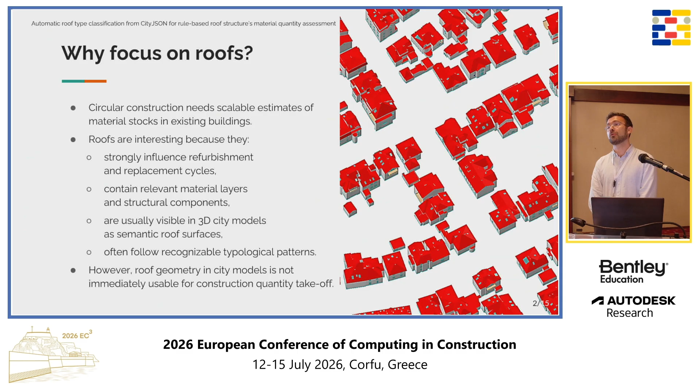However, this geometry of roofs in 3D city models isn't straightforwardly ready for use in material quantity assessment. So this research is a part of the European

Horizon project CircBoost, and our workflow here uses 3D city models where each building is used to extract its elements and multiply the surface, because all the elements are represented by surfaces, and each multiplied surface is extruded to model the solid layers of materials.

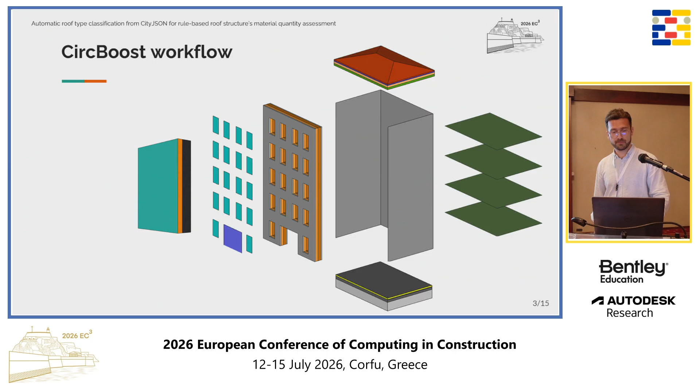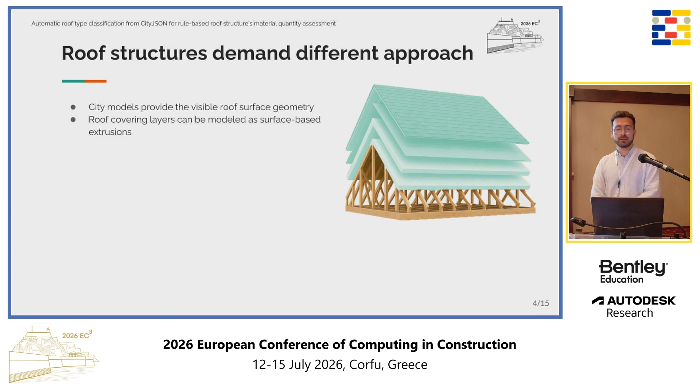So we do that for walls, doors and windows, roofs, also for foundation slabs, and also for intermediate slabs between floors. This logic works for most of the elements, but roofs are an exception, because you can easily model roof cover layers as extrusions of the roof surface, since geometrically that's what they are, but for the structure it doesn't work.

The situation becomes even more complicated having in mind the wide variety of possible structure systems, and it's also to be guessed, because we don't know what is inside or beneath the roof cover.

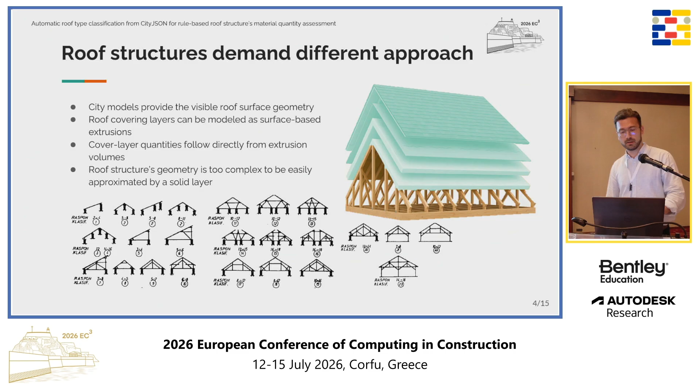So our proposal is a traceable chain. We use geometry as an input to classify the roof type, then we measure some metrics, and then we apply rule-based material quantities.

We use CityJSON as a backbone, with explicit geometric rules, so they are readable and challengeable. We don't use end-to-end learning, because when dealing with thousands of buildings on a city scale, what we value mostly, or equally as the headline accuracy, is traceability and robustness of the representation.

We implemented that in a single dependency-free Python module, where each threshold is a named constant, and basically every intermediate is exported so we can trace everything.

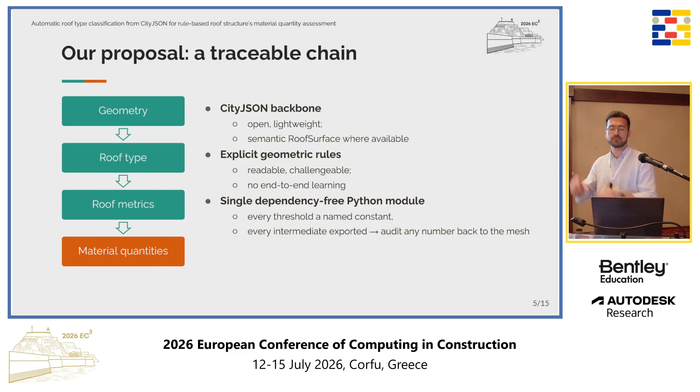So the pipeline goes like this. We extract roof faces, semantic first, with some geometric fallback, we merge triangle soup, which we will see, and you might guess what it is, into clean roof planes.

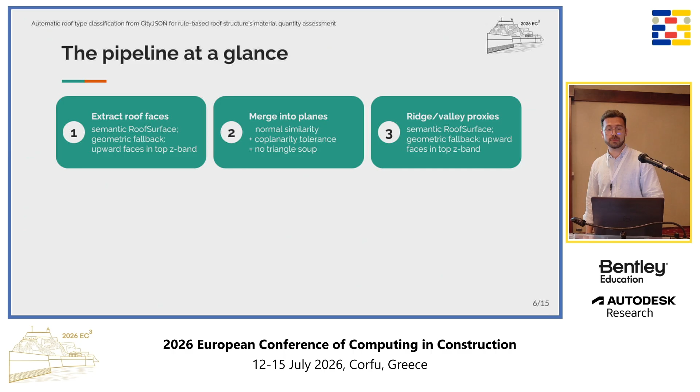Then we recover ridges and valleys from the shared edges.

So we extract the metrics and quality assurance parameters. Then we classify roofs, and in the end we just map types and spans into quantities.

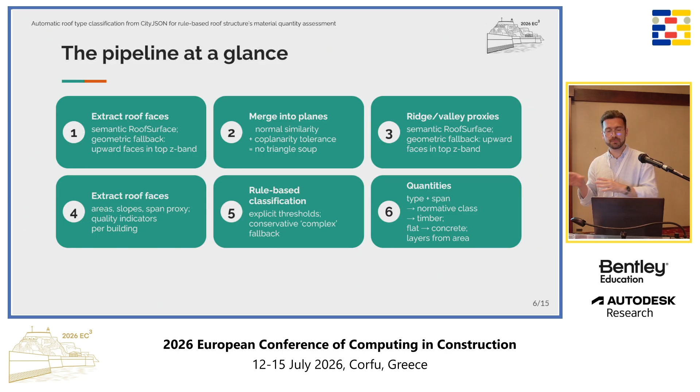So how do we get from triangle soup to roof planes? Basically, we perform this merging rule where all the faces with normals within 1 degree, on one hand, and on the other hand with the centroid within 8 centimeters, that's an empirical value, of course, from the candidate plane, we consider as one plane.

This second rule is just to eliminate parallel but offset planes, to avoid this situation. Usually in 3D city models all the planes are separated, so we need that to...

Merge. And for the adjacency, we established a deterministic shared edge map where edges shorter than 20 centimeters are ignored, and the edge sign against the normals of the two faces decides whether it's a ridge or a valley.

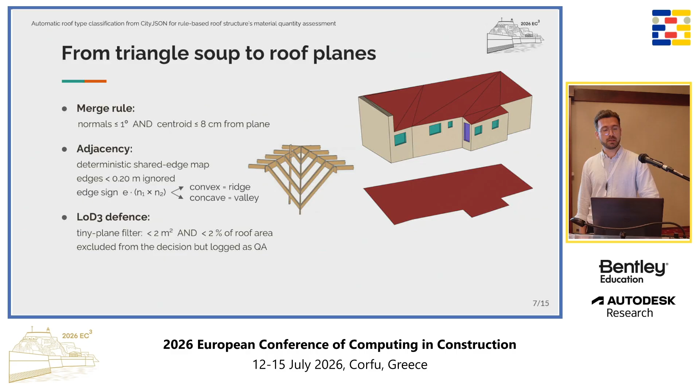So just to be able to perform on an LOD3 model, we activated a tiny plane filter where planes smaller than 2 square meters and 2% of roof area are excluded, but still included in the QA.

Okay, so how are the roofs classified?

If the maximum slope of all the roof planes is less than 5 degrees, we classify it as a flat roof. If we have one roof plane with slope larger than 5 degrees, then it's a shed roof.

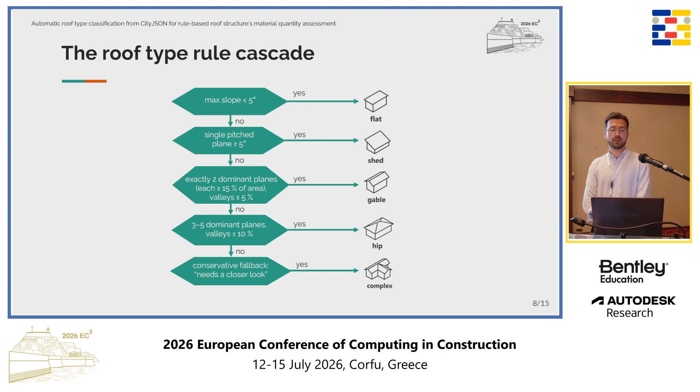Exactly 2 dominant planes, each larger than 15% of the area, and valleys less than 5%, then it is a gable roof. 3 to 5 dominant planes and valleys less than 10% is a hip roof, and the rest would be classified as complex, but with a fallback that this needs to be validated manually.

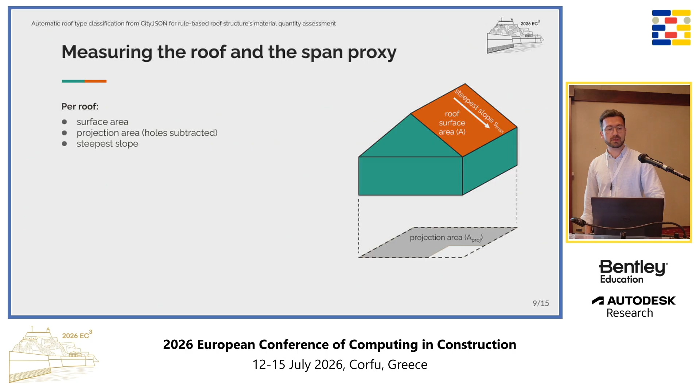So here are the metrics. For each roof, we measure roof's surface area, projection area, with subtracted holes from things like windows and chimneys and these kinds of artifacts, steepest slope of the plane, and effective plane count.

The span is also calculated, because not every footprint is in such a shape that it can be deducted directly. So we basically calculate the horizontal ring, take the largest ring and the minimum area rectangle, and the shorter side we consider as the span. We also extract QA quality assurance parameters such as manifold, non-manifold edges, and tiny plane count and area ratio.

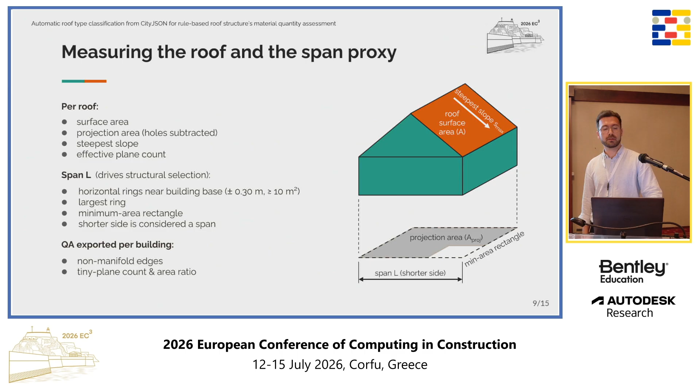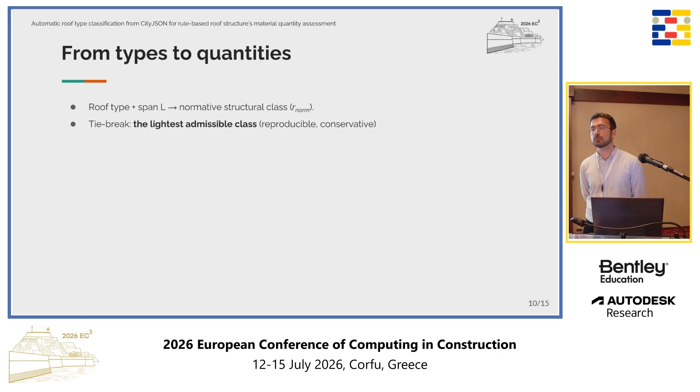Now, how we get from these types and spans to quantities: if more than one class is admissible, we use the rule of the lightest admissible class, meaning the class with the lowest timber consumption.

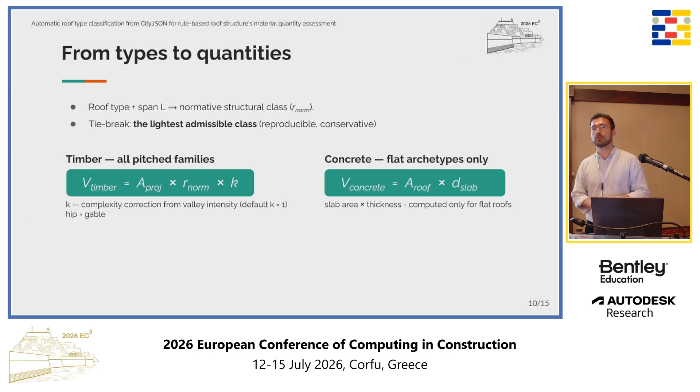For timber, the volume is calculated as the projection area multiplied by a normative structural class, which depends on the type and span, and also a complexity correction from valley intensity. For concrete, it's much more straightforward because it's applied only on flat roofs, so it's basically just a solid slab.

Our test bed consists of 88 labeled buildings of a Belgrade quarter in 2 levels of detail, level of detail 2 and 3, and we have 6 BIMs as a validation set for quantities.

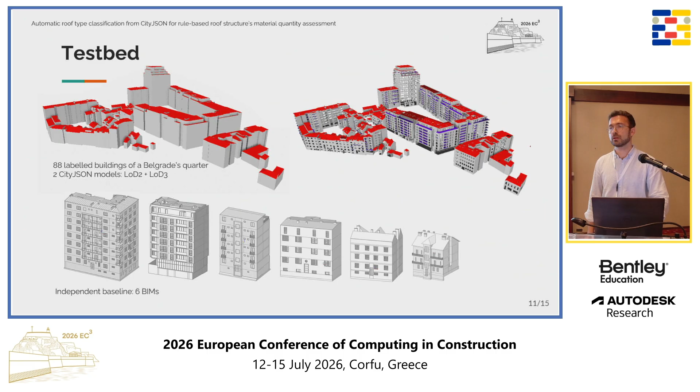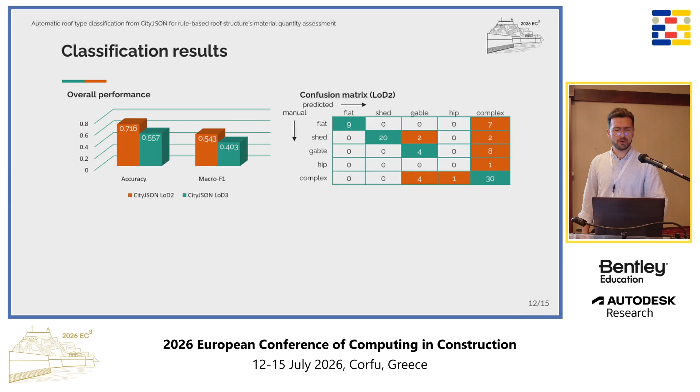So here are the results. We have 0.72 accuracy and a macro of 0.54. This is a confusion matrix, and the findings are that the best performing class is definitely shed roof with an F1 of 0.9. A bit less performing are complex and flat at 0.7, and the low performing class is gable with 0.36.

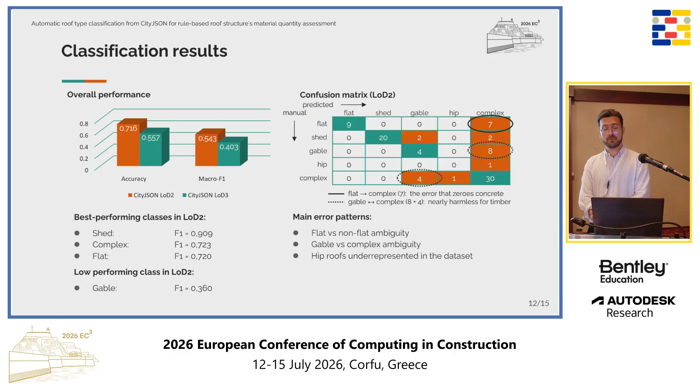So the main error patterns are flat versus non-flat ambiguity, and also gable versus complex ambiguity. We also have a problem that hip roofs are underrepresented in the dataset.

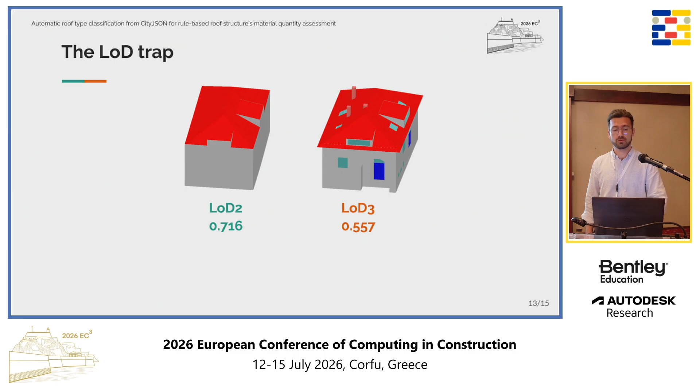It's important to point out that using 2 different LODs, using LOD3 drops the accuracy to 0.56, and the reason for that is dormers, chimneys, parapets, and such artifacts inflate plane counts, so it derails dominance rules. We activated tiny plane filtering, but it happens that it's not enough.

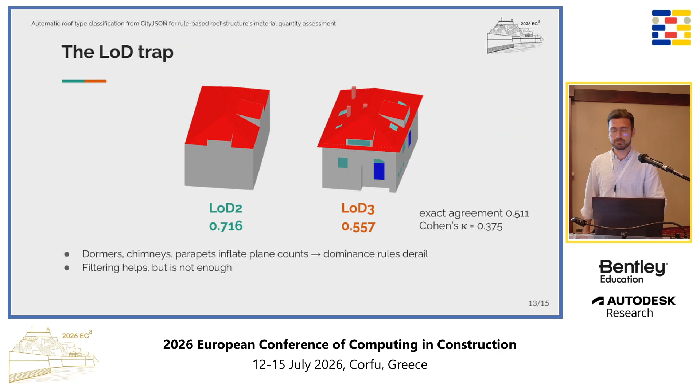What also can be concluded is that misclassification of the roof type doesn't affect materials equally. So timber is quite robust, it has 2% mean relative error, whereas concrete is much more sensitive. But it's actually reasonable because all the pitched roof types are mapped into timber, and only the flat roofs are concrete ones.

So the BIM validation showed that estimates land in the right regime. Remaining gaps are typology and the modeling scope, and the highest value improvement would be a much sharper flat, non-flat decision.

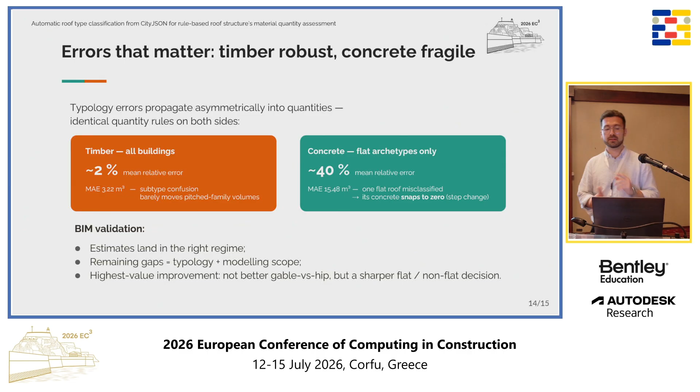So to conclude, I presented an open city model, auditable roof material quantities assessment framework, and we didn't use any deep learning or end-to-end learning.

Our preference was traceability and robustness, and interpretability of results.

We also consider, of course, deep learning for some ambiguous cases, and the results show that timber is robust, concrete can be fixed, and we find an operational LOD. The next steps would be roof instance segmentation, generalizing LOD3 into the stable structural surface, and area weighted flatness instead of maximum slope trigger.

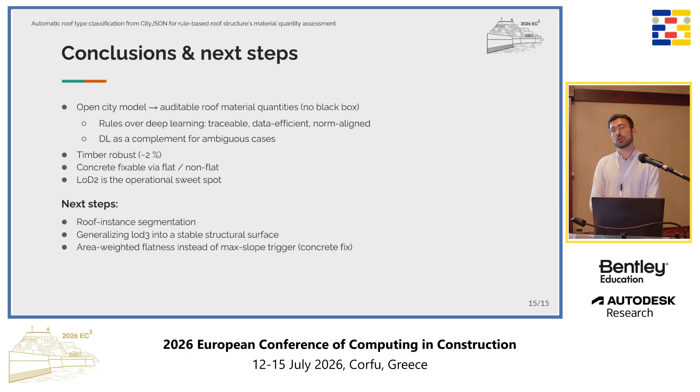This would sharpen the flat or non-flat decision for concrete. Thank you very much.